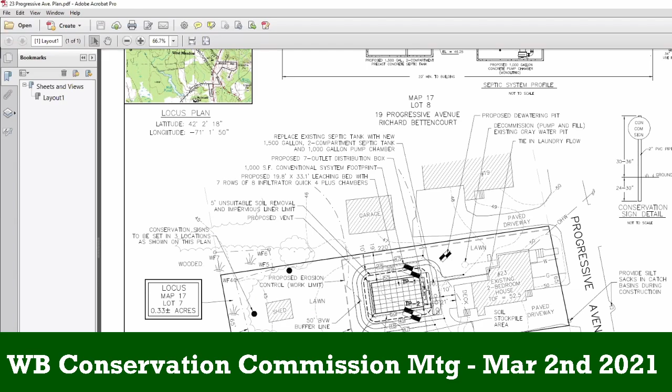Okay, then I will read 130 Bedford Street into the record under the Wetland Protection Act, 131, Section 40 of Mass General Law, as amended in the West Bridgewater Wetland Protection Bylaw Rules and Regulations. The Conservation Commission will hold a public hearing March 2nd for a notice of intent for a proposed repair of a septic system for a single-family home within the buffer zone of a bordering vegetative wetland at 130 Bedford Street.

And we're open and we have a presenter. Good evening. I'm Brad Fitzgerald from SFG Engineering, 28 Main Street in Lakeville. I'm trying to share the screen.

I can't seem to find my drawing though. Wait a minute, I might have it. Here we go. All right, you get that? Yep, we got it. Okay.

So what we have here, it's an existing single-family house with a septic tank and leaching area in the backyard, which is in failure. We're proposing to do a septic repair, a new septic tank, new leaching area, quick 4+ chambers, 1,500-gallon monolithic septic tank. We were granted approval by the Board of Health for setbacks to the BVW.

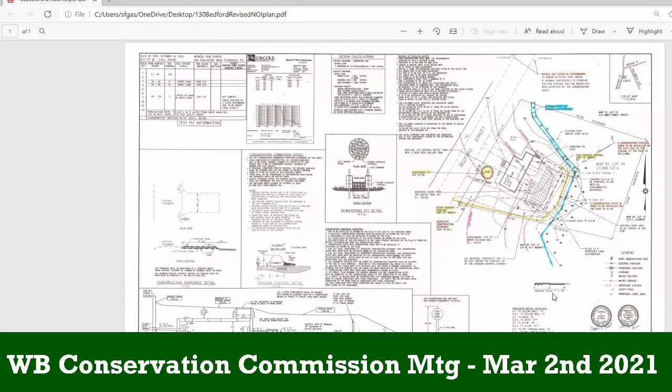The current owner - for the commission's information, can you expand the drawing or zoom in where the edge of the wetlands is close to the edge of the wetlands? In there? Thank you, perfect.

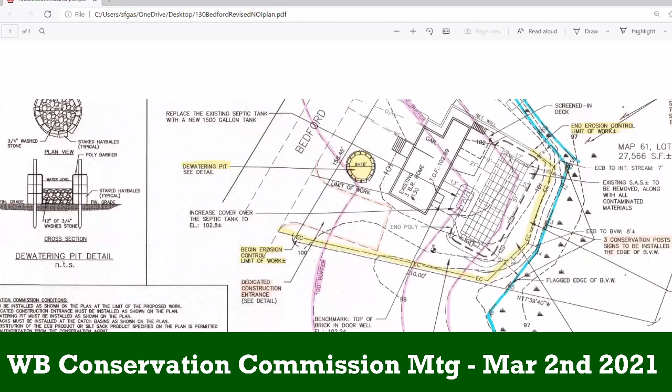During my inspection I discovered that the current homeowner, who may be deceased or no longer living there, or if so planning to move out - I don't know what the circumstances are - but they've been disposing all kinds of yard debris and other materials over the bank. I'd like the commission to consider a special condition that during construction of the septic system, that material be removed and disposed of properly, and let the grading go as shown on this plan. I believe we've got to get that material out of there. I know it's considered natural, but it's definitely impacting the wetlands behind it, and there's quite a bit of water back there.

That's my only comment, everything else I'm fine with. I reviewed it and asked Mr. Fitzgerald to update or revise his plan accordingly, but that's the only issue the site inspection discovered.

So that's actually filled into the wetland, John, not the 50 foot? Or both? Yes, the debris, that's right. It's probably filled in some of the wetlands, but if they just pull that back and put natural, good fill material instead of debris material, I think that would improve the conditions there.

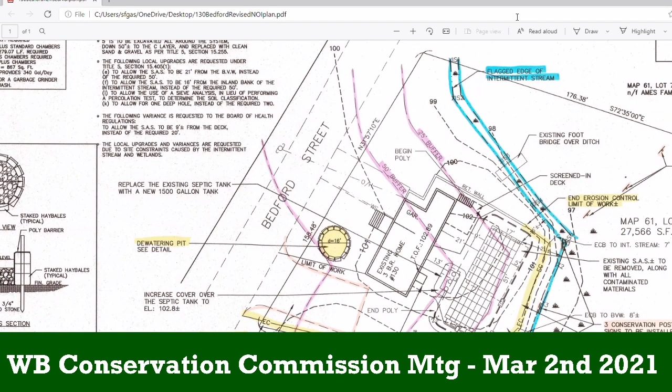Okay, next we have 11 Farm Road. And I will enter that into the record under the Wetland Protection Act, Chapter 131, Section 40 of Mass General Law as amended, and the West Bridgewater Wetland Protection Bylaw Rules and Regulations. The Conservation Commission will hold a public hearing through remote participation on March 2nd for the request of determination of applicability to determine if the construction of an in-ground pool at 11 Farm Road is subject to the Wetland Protection Act. And the public hearing is now open.

And do we have somebody presenting or speaking? Rebecca is here. Rebecca from Silva Engineering. I'm just trying to share my screen. That's okay. Yep, somehow, there we go. I keep clicking and not sharing. Oh gosh.

I'm usually, these are all, this is up off of West Street, right up there, right? All those new houses? This is Farm Road. Is it new? Oh, it's a new subdivision off of West Street. Why can't I do this?

I can't expand. Okay, this is being dumb. I'm sorry, that's okay. I'm remotely connected to the work computer trying to share my screen, so if I don't click the right screen it doesn't do anything for me. If I click here, no. Go ahead, they always take longer to do what they need to when you do that. So where's the controls? Oh, and I have two screens at the office. So now it doesn't, okay here we go. Share. Oh, I am sharing my screen. Oh there it is, look at that.

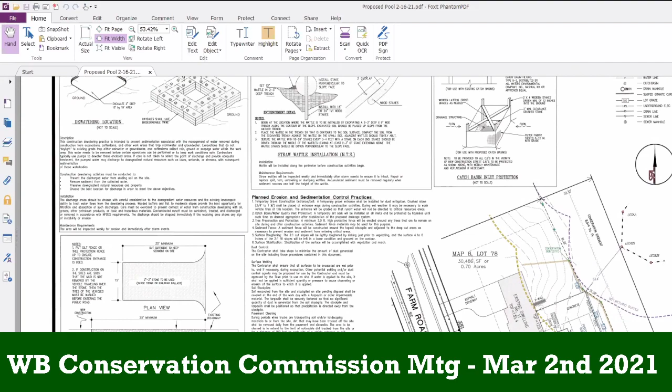We were asked to put a, no I'm sorry, construction entrance. And we were also asked to add catch basin protection at the down gradient catch basins. So if you have any questions, let me know. I can zoom in if you need to see. Really hard to see. Okay John, comments, questions, concerns?

So I've reviewed the plan, I've talked with Rebecca on it, or communicated let's say. And then I did the inspection, and I have a concern - not with the pool, not with the project. I think what they're proposing is approvable and so forth, but it's more of a question to the commission members. You will note, as Rebecca said, that there's a conservation easement along the back, which was recorded as part of the subdivision.

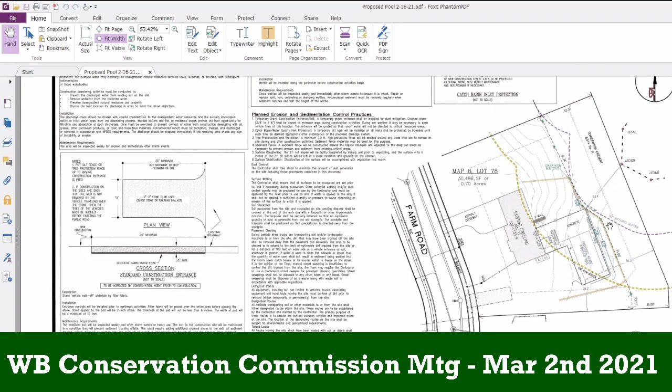And it has some areas that were greater than the 50 feet away from the wetlands, and I can't recall what the reason was for it, but it was probably because we had given some other considerations elsewhere within the subdivision, and so the engineer may have wanted to compensate for something that we waived elsewhere. So I can't remember, but regardless, it got recorded at the Registry of Deeds. And you'll note the squiggly little line to the far right of the drawing.

That's the edge of the lawn.

Okay, unbelievable. So my thought was that rather than the signs—because there were signs there when we issued the certificate of compliance for the builder, not for the current owner, but for the builder, and they're no longer there—my thought is that we need a fence along that line with signs on the fence. Yeah, unfortunately we're seeing more and more of this, and I'm either thinking the fence or I'm thinking an 8-foot tall granite post sunk 4 feet in the ground, cemented in with a marker on it.

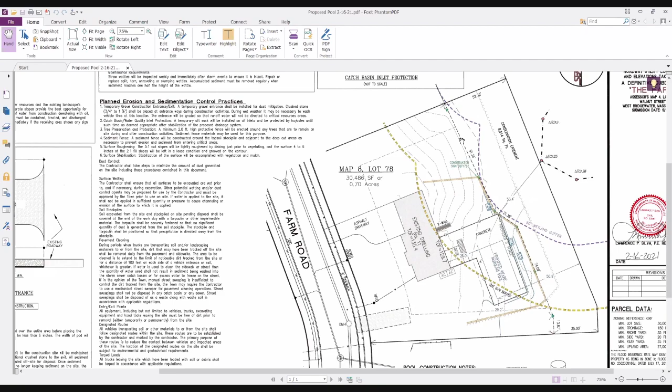You have, I'm showing green pipes, I'm showing little green dots, and we would be connecting those little green dots with a fence. So from here, here, here, all the way along in here. Okay, and then I would be connecting essentially where the little green dots are.

Sorry, I apologize, my screen went blank. No, I can do it again, it's taken a bit. That's okay. Yeah, I'll zoom it in, it's not loading yet. We can do nothing at all. Nothing's loading. Yeah, nothing's loading. Apologies on that. Do you have the plan? Sorry for interrupting, I was just curious on something. Yeah, let me grab the plan because I'm curious on it too.

So, where is the fence, guys? Just so I understand this correctly, where the property, the end of my property is, is where you guys want the fence, which would be in the woods right now.

No, no, it would not. Mm-mm. It would theoretically—I'm thinking of looking at the scale and everything—the fence would be probably about 30 feet on one end and 15 feet on the other from the tree line. Which, when you bought the house, theoretically the previous owners should have had the markers in place that said that was a conservation area and that you weren't to go any further, and it was a protected area.

I see. So right now it's all grass, part of the lawn, yep. So basically right where the lawn ends, right? Yeah, that's what I'm thinking. Like, so I don't know who went by there today, but we have, I mean, our lawn and then where the start of the vegetation is.

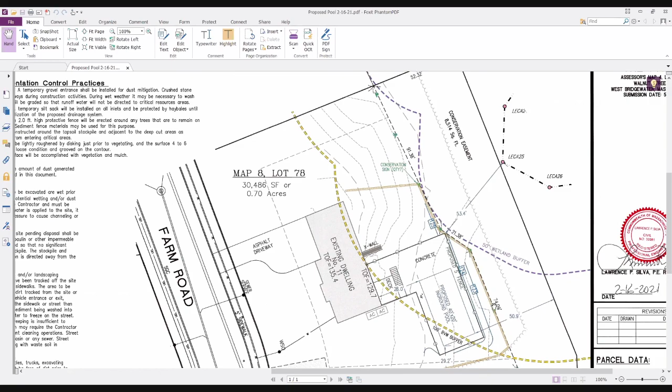We would have never even allowed you to have the lawn in the 50-foot area. If you look at the arc with a little indent in it, that area would have been a no-touch to begin with. Without the easement even being there, they shouldn't have even graded it, stumped it, treated it, or touched it in the whole process of this development.

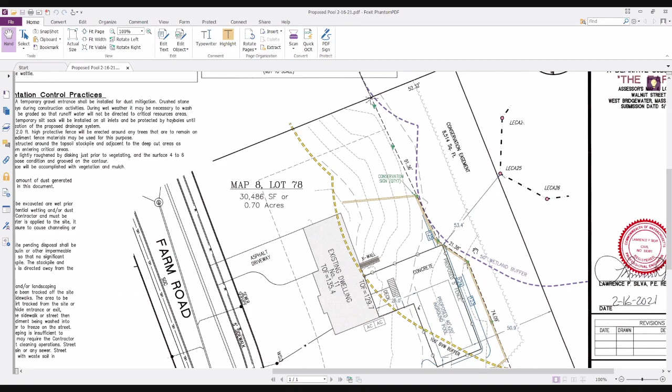That area would be protected no matter whether there was an easement or not. And it is protected. So let me throw this out as a talking point. I don't know why the lines were created the way they were for the conservation easement, because as you can tell, a great portion of it is outside the 50-foot no-touch. So whether it was because we gave them some relief somewhere else, I don't remember, but it got recorded just as it's shown on this plan with the green marker signs.

If the commission was willing to adjust that conservation easement, that would require the current owner and the commission to enter into an agreement to revoke and amend the conservation easement to follow the 50-foot no-touch buffer line, which at its closest point to the pool would be maybe 3 feet away from the apron of the pool, but then it would open up the rest of the yard, especially down to the bottom portion of the plan, for the owner to use all of that area. Then back up towards the upper part of the plan, there would be a small triangular slice they could use, but you'd still most likely want a fence all along that 50-foot buffer. It would require the current owner to record an amended conservation easement that applied only to his lot.

I can't remember whether the easement they granted us was because of the isolated wetland at the beginning of the project that they were going to be disturbing or not. Oh yeah, but all that front stuff, that's right. As John said, that's about the best we could come up with, is to let them at least rescind the easement and have use up to the 50-foot, if we wanted to give them that area to use.

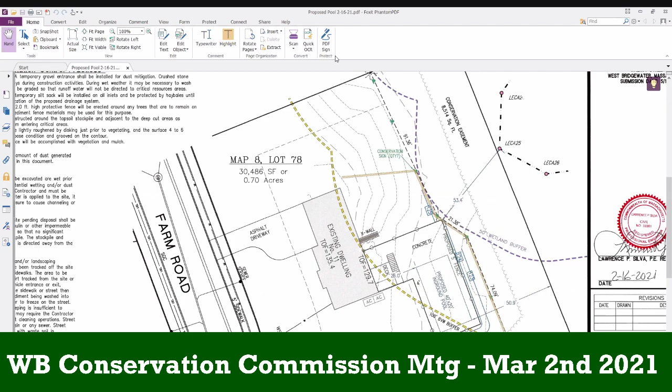Okay, John, we have administrative discussions next, I believe. There's a Manley Street item. You want to start with the Manley Street United Drive? Yes. So I'm going to share my screen. They can hear us. Let's see what I've got.

All right, hopefully everybody can see this on the screen. I took the discussion and some of the items that came out during our discussion at the last meeting and called them discussion items, as listed. I know the commission had some concern about where the existing use ends and where the rest would be protected as buffer. My thought was that a visual barrier at a line that is finally agreed upon is required.

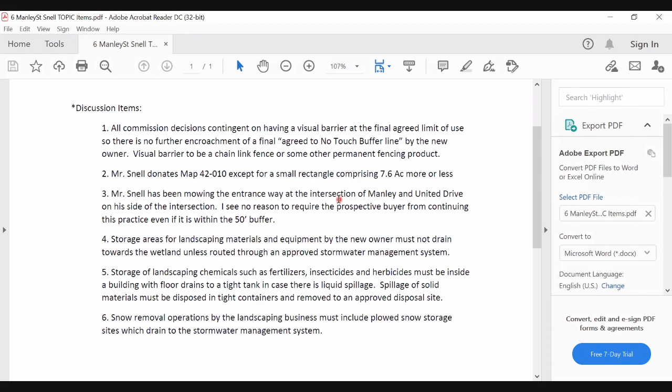So that no additional encroachment would occur by a new owner. It was also contingent upon Mr. Snell donating that parcel of land right behind there, which is 7.6 acres more or less of usable recreation land on the river. Also, it came out that there was discussion about Mr. Snell, or the new owner, being able to keep the entranceway to the United Drive and Manley Street intersection clean and clear of vegetation, which mostly looks like lawn right at the moment.

There was discussion about storage areas of landscaping materials and equipment draining into the wetlands. So I'm suggesting an approved stormwater management system would be required for the contractor's yard, and that storage of chemicals such as fertilizers, insecticides, and herbicides have to be within a building with containment that would drain to a tight tank if there was a liquid spill, or there would have to be materials there to sweep up and contain solids that might accumulate on the floor through broken bags or containers.

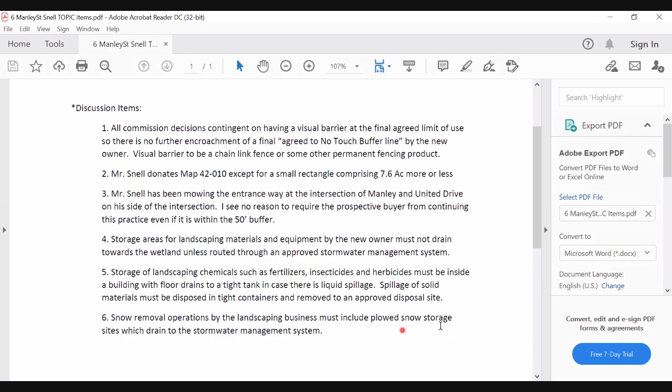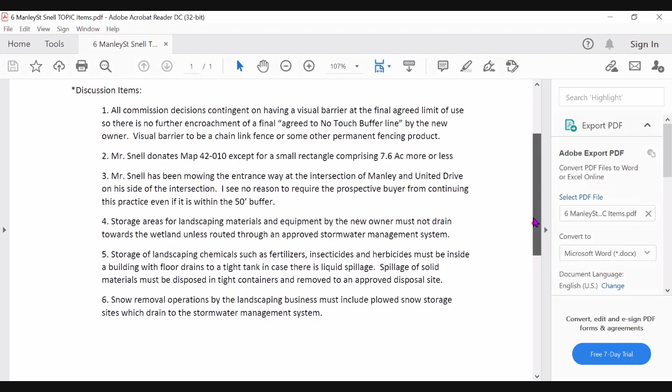So that they don't get into the wetlands. And finally, snow removal operations must include storage areas which drain to the stormwater management system and not into the wetlands. This isn't the only thing, but if the commission has other concerns I didn't hear at the last meeting, we can add them to this for discussion purposes. I wanted to put that out there as the initial discussion topics, talking points.

I think the easy one right off the bat would be number 3. If he's already been mowing and maintaining that lawn area, I see no reason to put a restriction or change it if the new owner wishes to keep doing that. So that one should not be a problem to deal with.

And John, if the new owner is going to use it as quote-unquote a storage yard and isn't planning on paving it or doing any alterations, then the stormwater management controls, I'm thinking, would be a kind of minor project to have installed or put in.

Yeah, so let's just say it was gravel, and as long as it's graded away from the no-touch buffer that we finally agree upon and away from the wetlands, and allowed to accumulate in a designated area within the site, then I think that handles that kind of concern. So it doesn't have to be, at this point, a formal paved system — it just needs to be spelled out how it's going to go and be maintained that way.

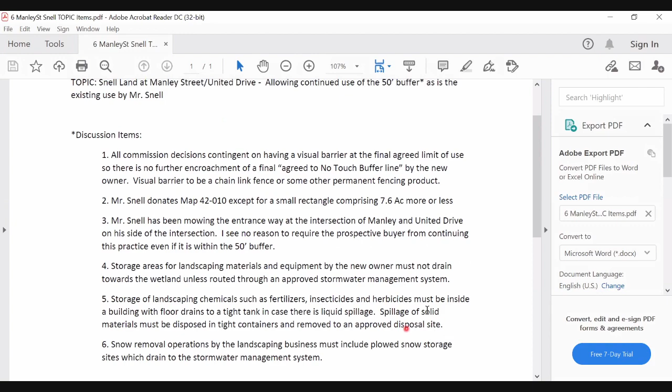After talking with John this morning, I went and met a proposed buyer. I can't say he's a buyer because we haven't signed any papers yet. He's more into utility type work, not a landscaper, so he won't have chemicals or fertilizers in the area. He doesn't plan to build right now, but I made him understand that if he did build, he'd need to protect against runoff and oils as required by state regulations, and he's going to follow it.

They're operating now in Stoughton and have a pretty clean yard. They're a successful pair of brothers, and I have confidence they'll be an asset to the area, not detrimental in any way. I told him he has to give extreme protection and consideration to any wetlands. He said, we're doing that now, it's our business, we deal with it every day. So I think he's reliable and will work with the board when the time comes.

I don't think he's planning to build right away. It's a big move for him, and obviously I've got a lot of cleaning up to do myself. We're going to work together on it. That's what I'm looking to do.

So I would like to support the buyer being able to continue using the areas we've been using. As John pointed out, the grade actually drops off at the vegetation line, and even before that in places, which is good. So there won't be a case where trucks are backed into the woods.

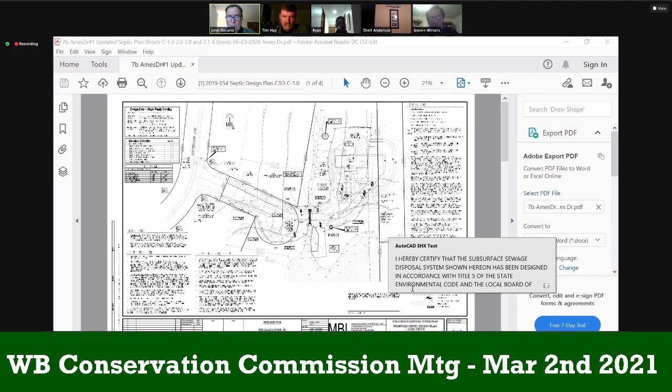All right, can everybody see it? Yep. Yes.

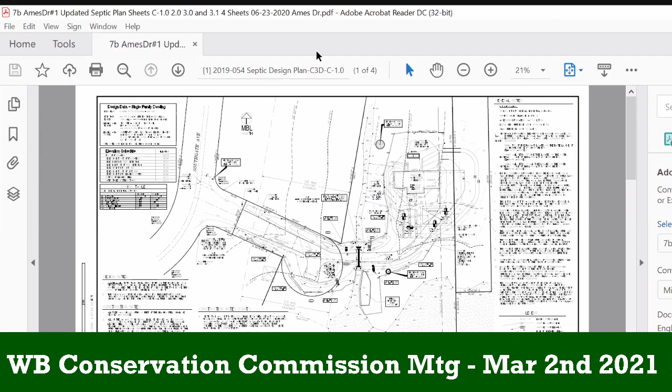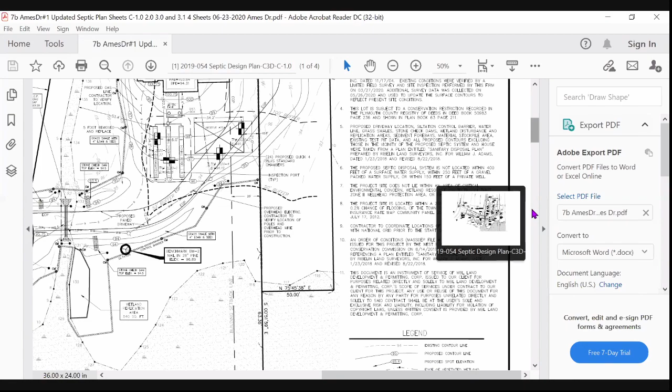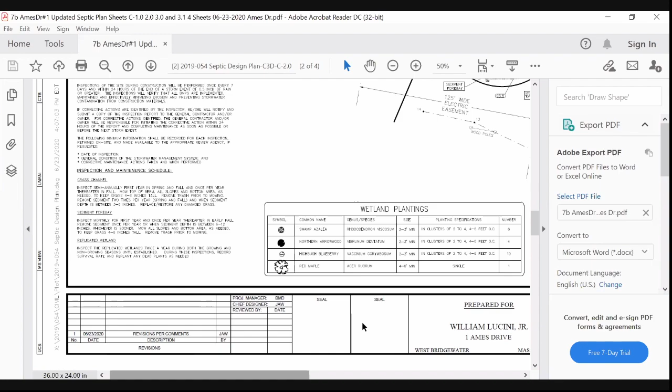So we had approved a plan that was dated June 4th, 2020 as a minor project change. And in discussions with the site contractor, I've discovered that there was a more recent plan, 6/23/2020, which is not the plan we approved. So I asked them to request a minor project change and explain why. Mr. Will Lucini, the son, explained that they went from a 3-bedroom house to a 4-bedroom house and needed a bigger septic tank. They didn't change the footprint of the house, just the number of bedrooms. So the plan, because it's different than what we approved as a minor project change, has to be approved again.

But I also discovered that they had proposed overhead wires to the house, and National Grid is reluctant to do overhead wires underneath their utility easement, which runs from here to here, can you see my cursor all right? And so they're going underground, which I have another drawing that shows, and I'll call that one up.

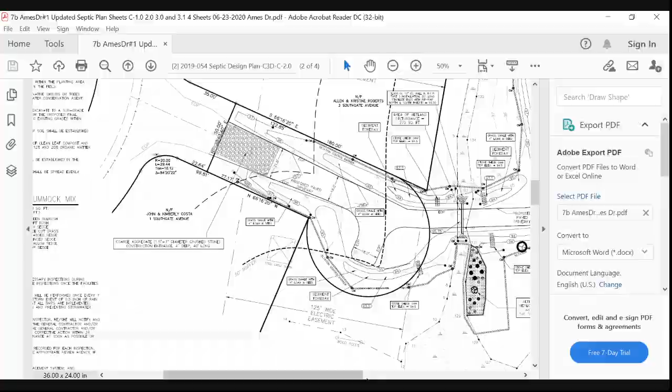I'm very familiar with National Grid and their requirement for underground utilities within their easements. I bet you are. Mine are encased in concrete to go the whole entire distance. I'm pretty sure this easement is going to have to be the same thing. My choices were concrete or steel pipe, and the concrete was a hell of a lot cheaper than going 1,000 feet of steel.

And to be honest with you, I like the look of underground anyways. Seeing those big poles out there ruins the view.

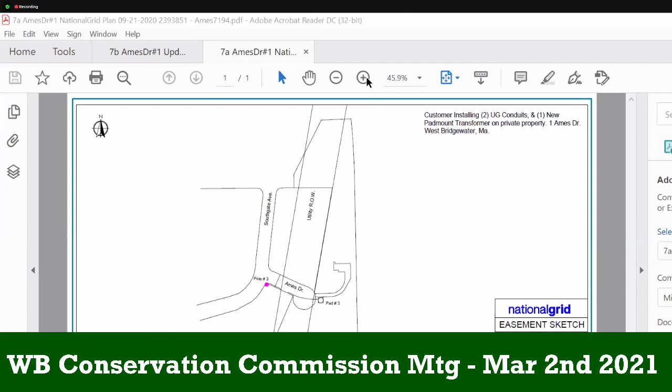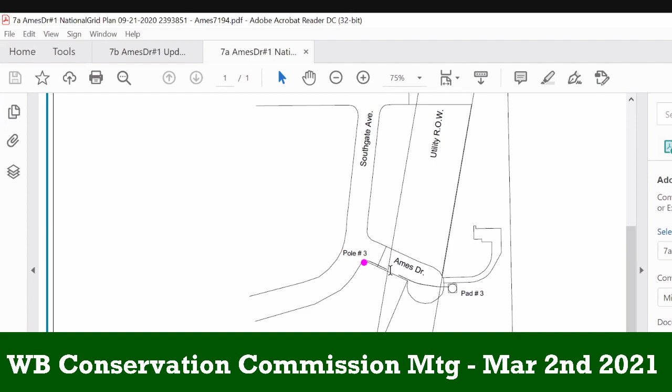So here's the drawing. I'm pretty sure you can all see it. This is by National Grid. So there's a pole here. They're going to go underground to a pad, and then from the pad the electrician will run underground to the house. So that's a change as well.

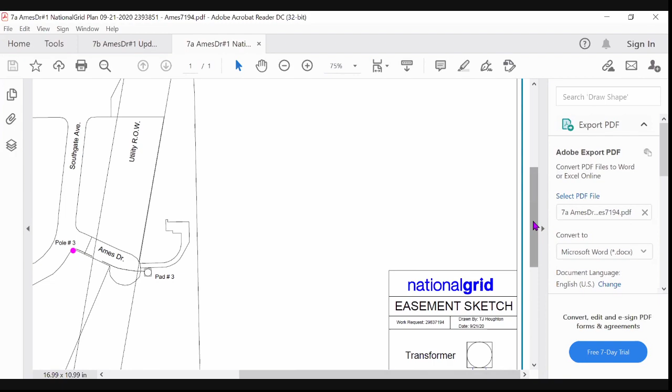National Grid has to know that the commission's okay with it before they'll do it for them. My recommendation is that if the commission agrees, we issue a minor project change for the June 23rd revision for the larger septic tank, and also include the National Grid plan dated September 21st, 2020, using those two as references for a minor project change.

What happens if we didn't agree on the underground? What would happen? Would they not be able to do the project? Would they not be able to get the house? It'd probably be appealed and we'd go to court.

Now my question, John — not like we got much choice. Go ahead. National Grid hasn't put the utility hookup in yet? No. Really? Wow, I can't believe that hasn't happened yet. I mean, the house is almost fully done. That's a lot of generators.

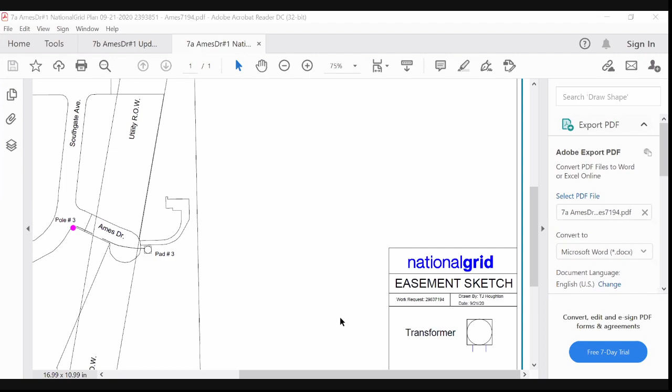I'm going to stop sharing this for a second because I want to bring something up with that other drawing, which I noticed today as I went by it.

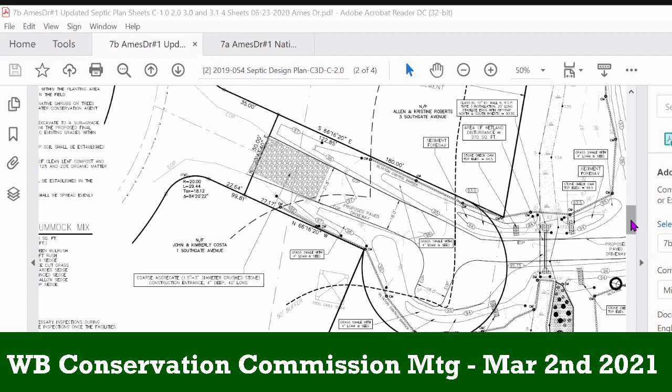All right, so here's the area that I'm concerned about. This is the property line, yet the plan shows grading going over into this abutter's property, with the driveway going over into the abutter's driveway. I have no issue with that, except the commission can't approve work on somebody else's land without them being party to the permit. So I want to look into what this is here before we approve a minor project change.

What's that other person's property there? Is it just woodland, or an area? There's a beautiful hayfield over here, and some woods in here, and probably the best way to describe it — I believe it's owned by somebody who sells turkey sandwiches.

They probably haven't granted an easement for the driveway to be on their property, I'm thinking. How can we approve this? We've got to have something in writing to indicate that the owner of that property is aware of it and has either sold it or granted the easement, as you mentioned. And I have nothing to show for that.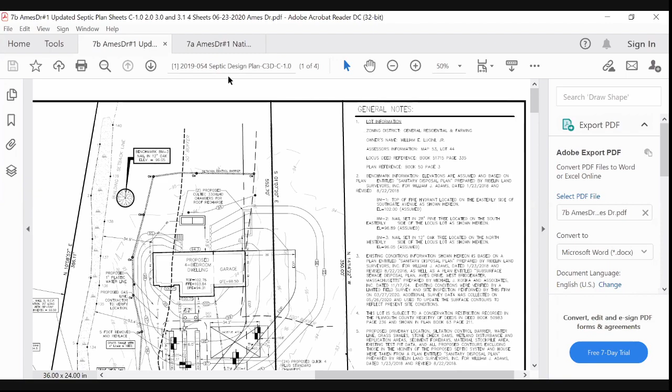Typically, an engineer would draw a plan showing the easement around the filling, around the edge of the driveway. But this plan shows nothing of that. Now, I do say that without looking at every plan, so let's look at the next one.

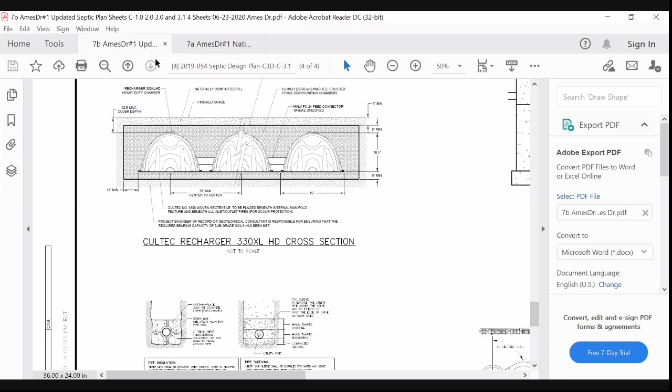This is the detailed plan. So none of those site plans appeared to show any easement there. So we really have to be careful.

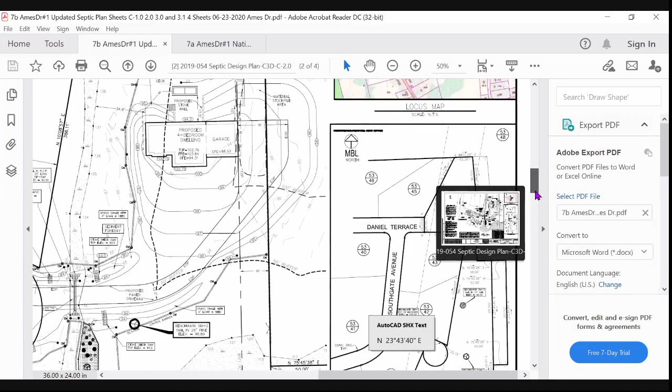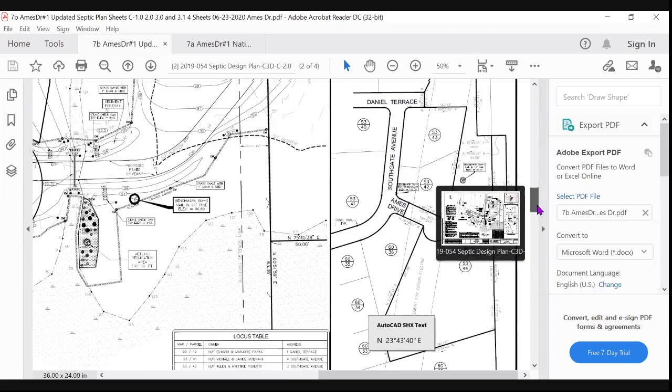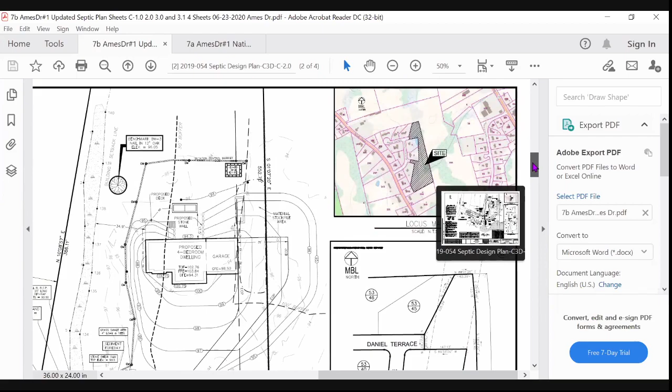Oh wait a minute, what's this down here? Aha — with the little bump out, there's a little bump out, but what's that referred to? Okay, so here's a 50-foot here. And it doesn't show up there, so...

Do they hope to have it maybe in the future? So we've got to get to the bottom of that. But if we do get to the bottom of it and have a legal document, I would recommend issuing the minor project change, contingent on finding out about that.

At this point, you want to just hold off on doing anything till our next meeting and hopefully get an answer by then? I mean, waiting two more weeks for National Grid to schedule the underground hookup — it's going to take them months the way National Grid moves to get the hookup done anyways, so okay, two weeks. We'll continue the Ames Drive item until we get clarification.

Wouldn't the builder even, whoever's doing the house, think about this? That could be a potential catastrophe for them if they can't use that property — I mean, that's the driveway and stuff like that. If I remember right, John, wasn't there a stone wall right along that whole entire property line? Yeah, so while I was walking the site, I'm seeing the stone wall and all of a sudden it ends because it's filled over.

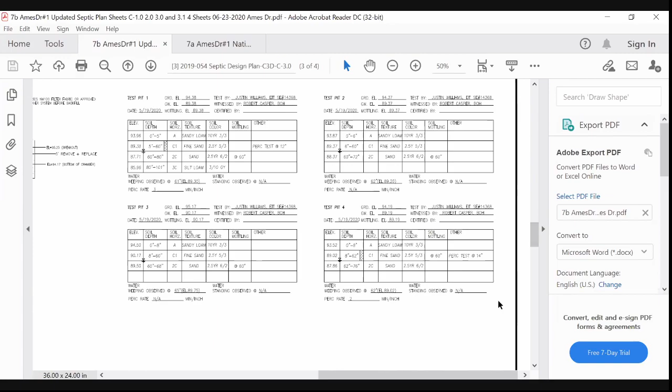Let me stop sharing this. Well, I'll try to talk while I'm trying to do something. That might be difficult, but let me give it a shot.

We had held up on 164 Lincoln Street. We issued a certificate of compliance, but we held, I think it was $3,500 surety, because we had an as-built that did not show any of the conservation markers around the project, since they weren't in at the time the engineer went out to do his as-built. When I went out to do the conservation certificate of compliance inspection, the signs were in, but they weren't on the as-built. So we held money for it, and about a year ago... now it's finally completed with an as-built showing all of the conservation wetland signs.

So I'm recommending release of that surety back to the developer, and the current landowner is aware of that. I spoke with her today, and they have no issue with that. So my recommendation is to release the surety. I'll entertain a motion to release the surety for 164 Lincoln Street.

I'll make the motion. I'll second it. Moved and seconded. All those in favor? Aye. So moved. All right.